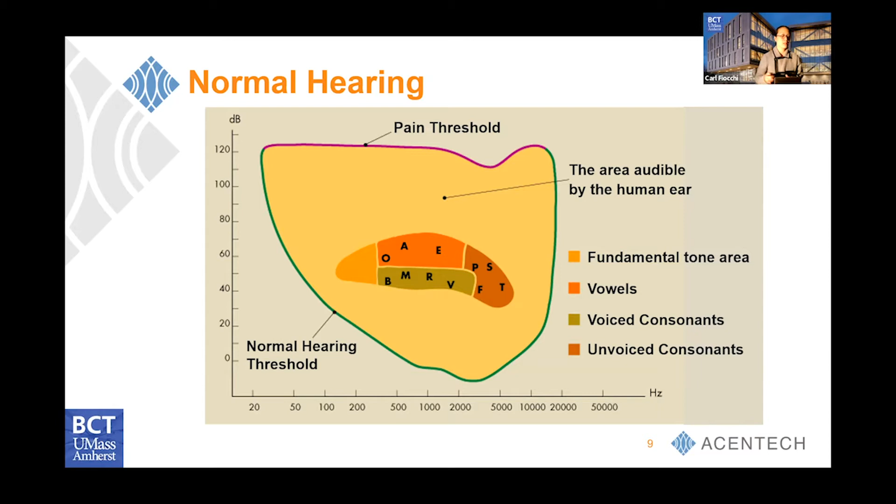I just wanted to say, sound is also noise - it's the same definition to an acoustician. However, some people that think of music, you think it's music, they might think it's noise.

I found this XKCD comic that I thought was funny, where they're getting the noise from outside and trying to cancel it from the inside, which really doesn't happen. But it's a nice interpretation of what to you is music may be somebody else's noise.

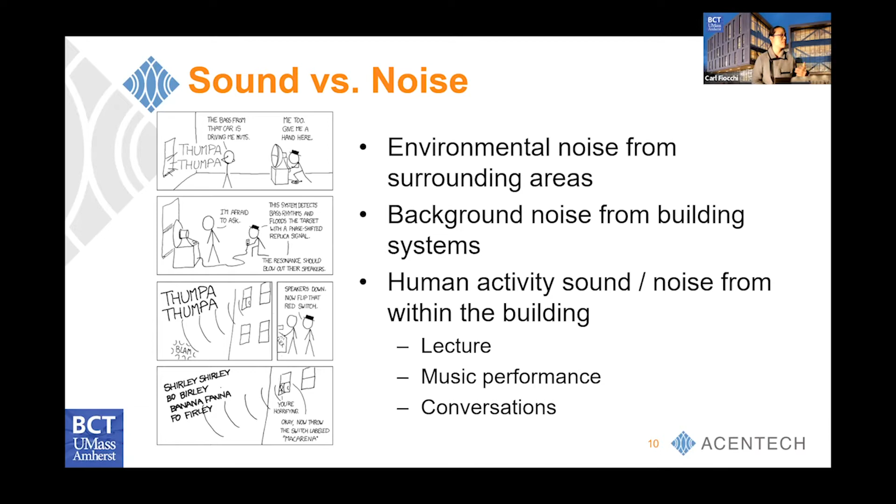The background sound level that we hear in a space also varies a lot. That's usually related to the building system and also the environment - the environment from the outside coming in and how it impacts us on the inside. We're not hearing any traffic here, for example, but if you were next to a train track, you would hear a lot of environmental sound, which we would usually call noise instead of sound.

In more critical spaces, we would start thinking about having it quieter than normal. On the left curve here, you see this is a metric we use called noise criteria. The lower the levels are, the quieter it should be. So the NC levels equate to the quieter spaces.

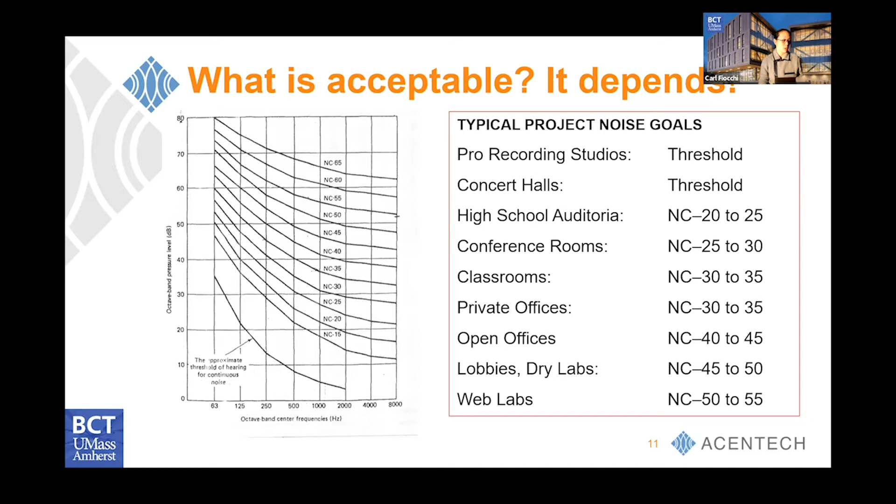A lot of strategies are done to control noise related to HVAC systems. Generally, we look at this ahead of time before things are built so that it's not a problem after everyone moves in. So what we do is study the HVAC system, the MEP system, to make sure that they're quiet. If they are not quiet enough, we rely on a lot of the equipment information to predict how noisy they might be down a duct.

In addition, we collect samples of sound levels in the community and the environment to figure out how noisy a site is. We can help design the building envelope and make sure that it's actually quiet enough inside for whatever we need.

In addition, we think about how the floors and walls and everything are built so that we don't hear, for example, the wood shop up in the seminar room upstairs. Those are things we can plan ahead of time so that we don't have as many surprises.

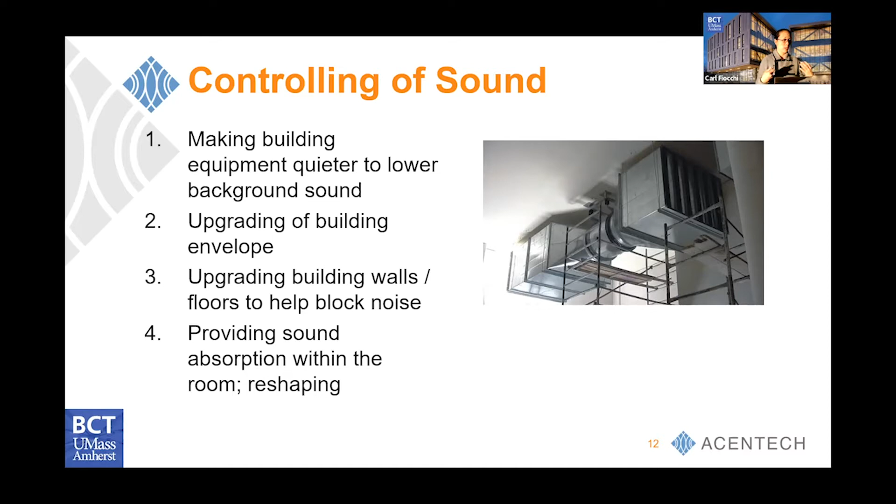Lastly, for critical listening spaces, we try to make sure that the space is shaped and provided with sufficient sound absorptive treatment so that the space actually promotes speech clarity, and also serves whatever the purpose may be for our use.

Vibration is just a different form of waves, right? It is oscillation due to an excitation of a mass.

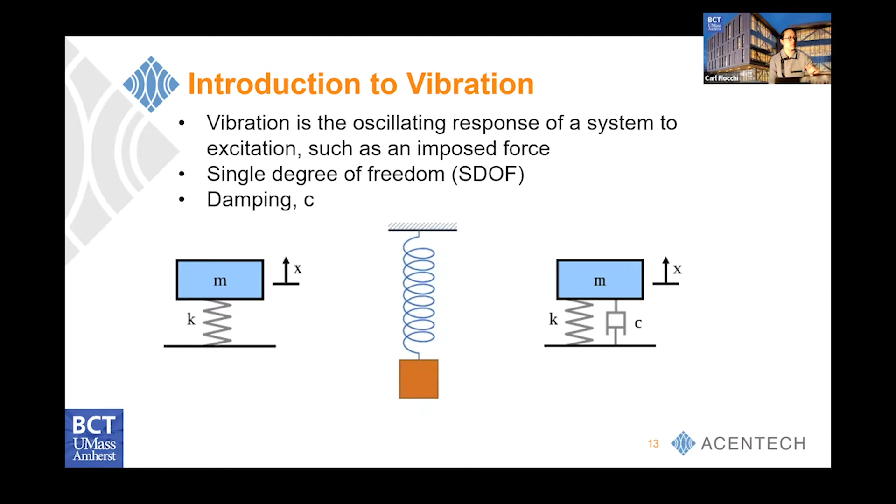You probably learned this from physics classes, for those of you that have taken physics. Here you can see it's a single degree of freedom motion. On the left side is just with a spring, but on the right side it includes some damping, the constant C. Nothing surprising here.

But in real structures, as you know, it's almost never a single degree of freedom. There's always the fundamental frequency, and then beyond that there are harmonics to it. On the left side, you can see that's the fundamental frequency, and there's only one level of oscillation, but at n equals 2 it becomes more complex. When you have a rectangular plate, it has yet another different shape at a higher order.

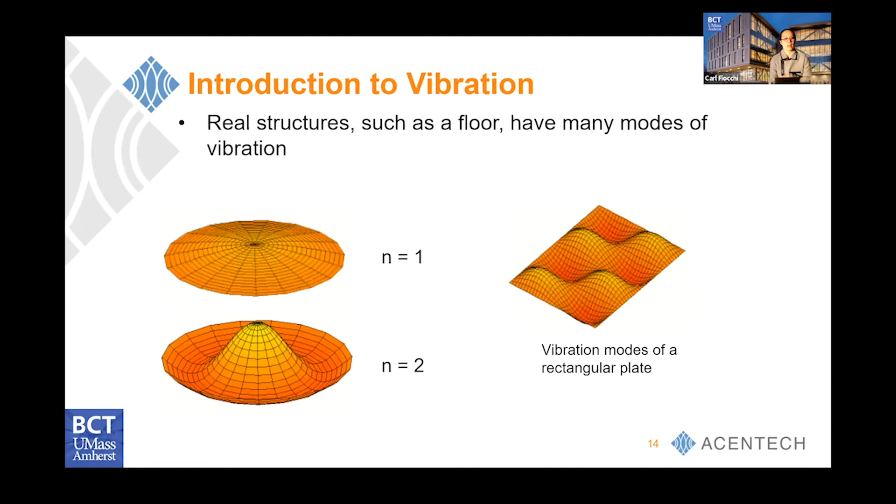So those are the kind of issues that we want to make sure the building structure addresses ahead of time so that there are as few surprises as we can have.

So for vibration, it's in general 100 hertz down all the way to the left, kind of like the mathematics, all the way at the very end. It's usually what we as humans or instruments feel in terms of feelable vibration on a building structure. So usually it doesn't overlap with the sound part.

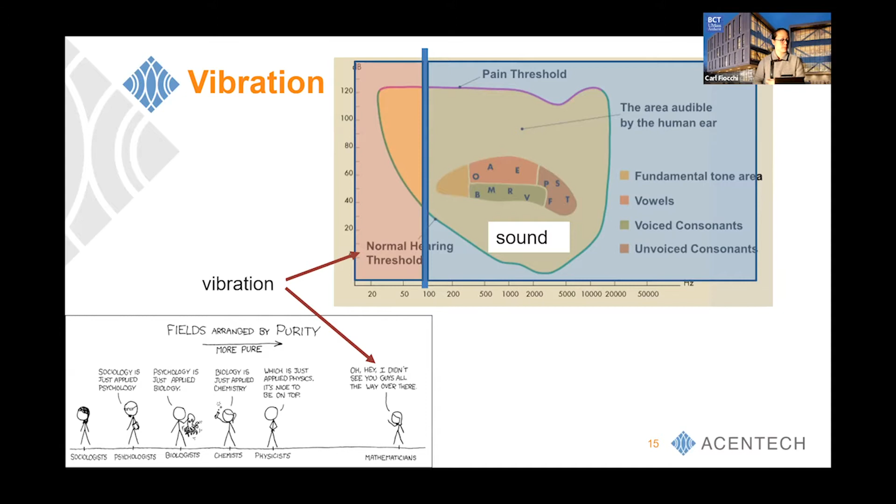There are two main types of vibration transmission, at least on footfall. The first is that initial impact you strike on a floor, which may be just impulsive sound. The second type is more like when you shake your leg after that initial footfall, you're actually exciting the floor more, and it may cause floor resonances that transmit down to other things that have the same natural frequency.

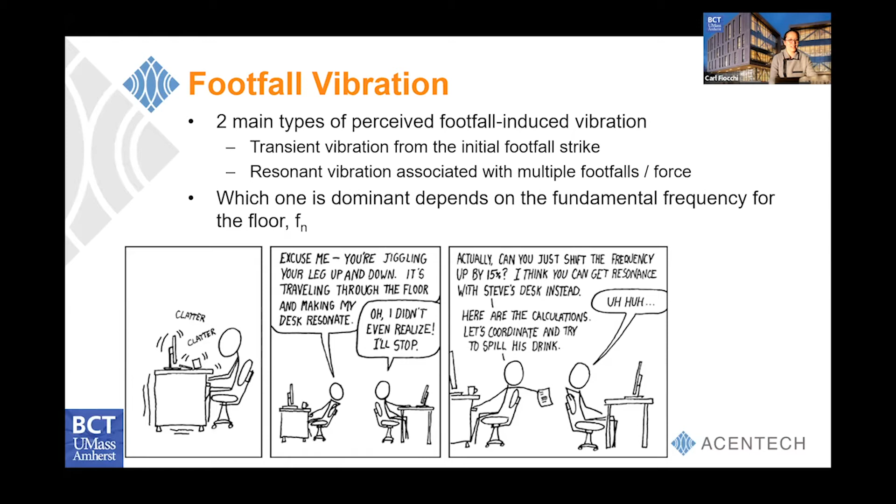Aside from building structure, there are also vibrations from the environment that we have to worry about. This is more the case with urban environments where we have subways and trains, and airplanes for sound, but there's also ground-borne vibration that may be near your building that we would survey ahead of time to make sure it wouldn't be an issue.

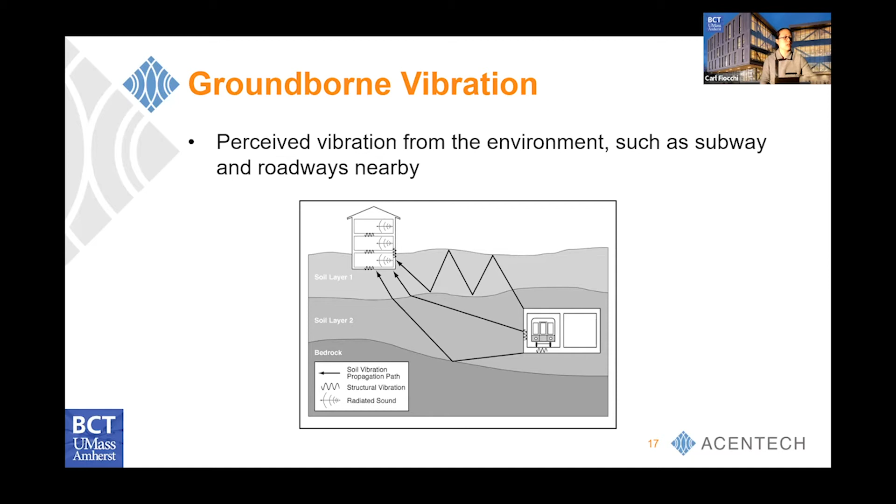Not in UMass, but at other universities, if you're building very vibration sensitive science facilities such as fabrication or clean rooms, a lot of times we will actually survey the site to make sure there are no surprises of ground-borne vibration that may contribute to our new building.

A lot of the instruments, in addition to human comfort which is what we've been describing - how much you feel vibration from the environment and also from the building - we're actually not the most sensitive. There are other things more sensitive, such as instruments for labs, and vivarium mice are actually more sensitive than us. They may be tolerable of high noise levels, but they may not breed if they feel too much vibration from the environment or from you walking by near their breeding area.

Other things sensitive to vibration, and some also to sound, are imaging equipment. Those are looking at microscopic atomic levels - imagine if you have something imaging a slice of an atom, you want to make sure that image is clear. If you have a lot of vibration impacting the image, and some of those image captures take longer than a few seconds to collect, that becomes an issue. So those are the kinds of areas where we'd worry about vibration.

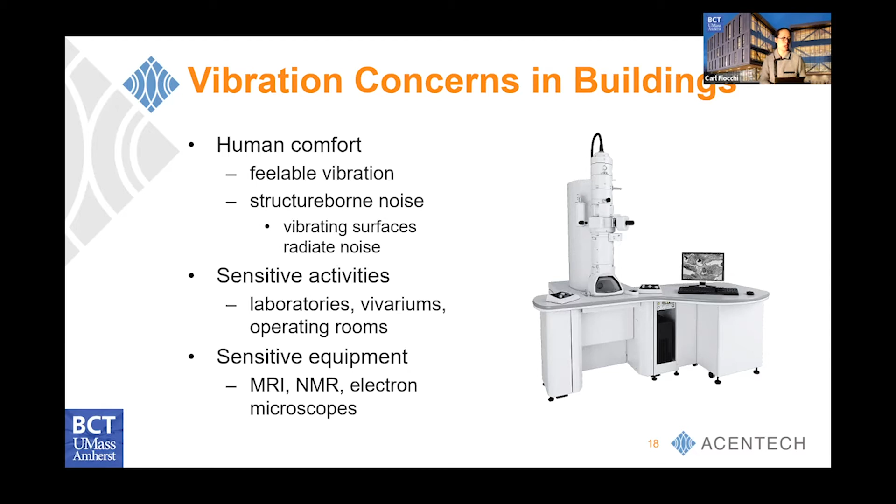The critical thing for controlling vibration is adding stiffness to a structure. In general, if you have columns or beams underneath a plate, it's going to be stiffer. Adding mass also helps, because as you think about it, adding mass means you'll block sound and also help reduce vibration. Another factor is the spring constant K and the damping C - you can add damping, and that would also help reduce vibration.

For on-grade type conditions, such as when a subway is coming in, that's a lot more complicated and usually involves isolating the whole building foundation. It's not always effective, so it's something more specialized. But for above-grade type structures, that's easier to predict.

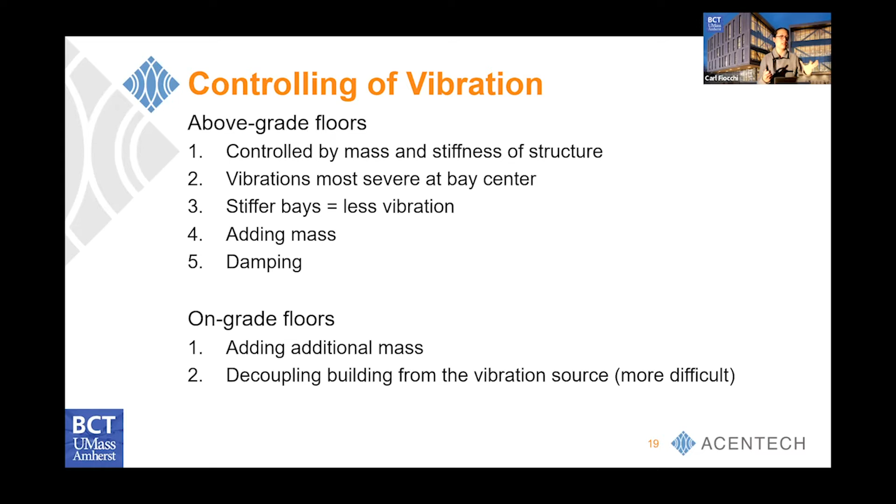So now we're going to go into what that means to our building and beyond for mass timber. Maybe some of you have seen a lot of these resources that the US and also Canada has put out. I'm sure there are many other equivalents in Europe that I can't read or haven't found, but I found the Canadian documents to be probably the most detailed in terms of what to do.

I think sound and vibration are topics for mass timber, not because we're unique, but also we're kind of the Achilles heel of mass timber in some ways. To help promote mass timber, we have to address them, otherwise sometimes that becomes the driving issue. So in today's world where we're trying to reduce embodied carbon, we should think about this, but also keep in mind that sound and vibration issues do come up occasionally, depending on the type of building we're designing.

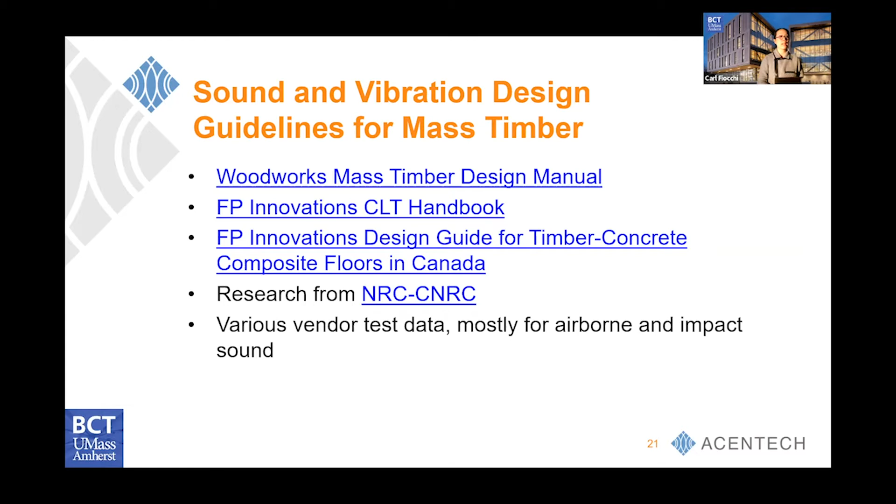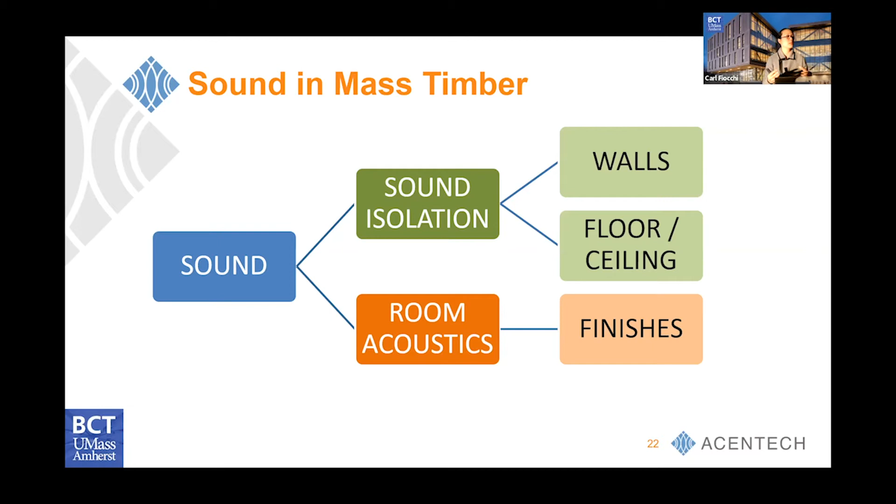So for sound and mass timber, the two things we mainly look at are sound isolation and room acoustics. Sound isolation is how much noise can we block by having mass between the source and the receiver - that could be your floor, your ceiling, or your walls. Room acoustics is more about how the enclosed space is going to sound with whatever materials we select in that space.

The ratings for sound isolation break down into two separate ratings that are most commonly used. The airborne is commonly rated with sound transmission class, which is how much the sound travels through the air, then through the solid medium, and then to the receiver end. Structure borne is what the previous one showed, all the lines flowing through the yellow parts of the structure. The airborne is more just across the actual element, like the D part, and the F are all the structure borne.

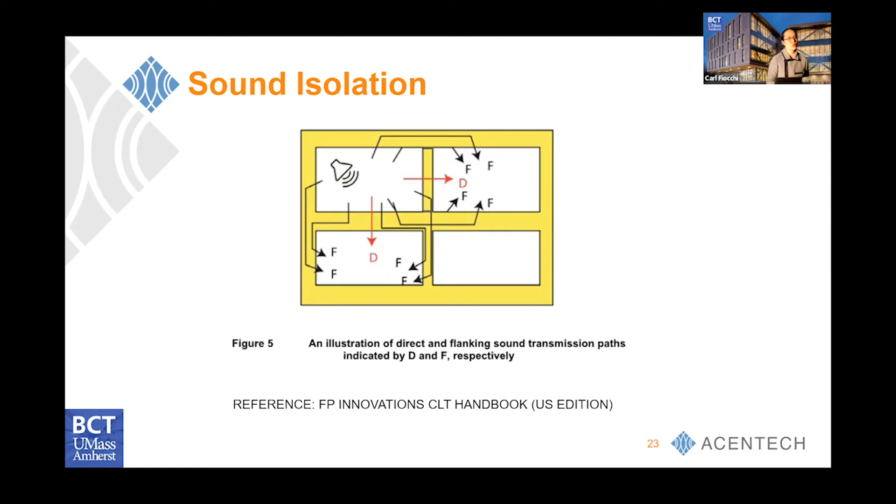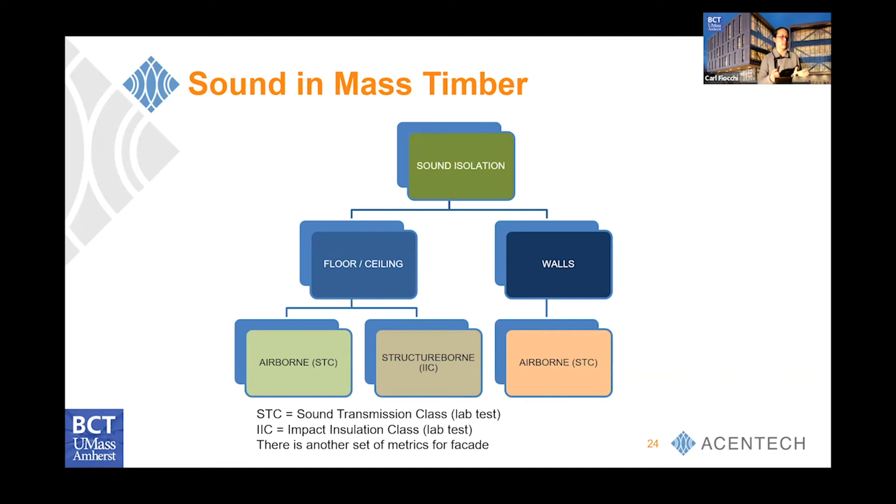Those are addressed with the IIC rating, which is impact insulation class. Those two things show up a lot in the mass timber manual as you design buildings, and some buildings are required to meet certain STC and IIC ratings. Sometimes this drives people to figure out what it takes to meet those numbers, because sometimes they might be too low.

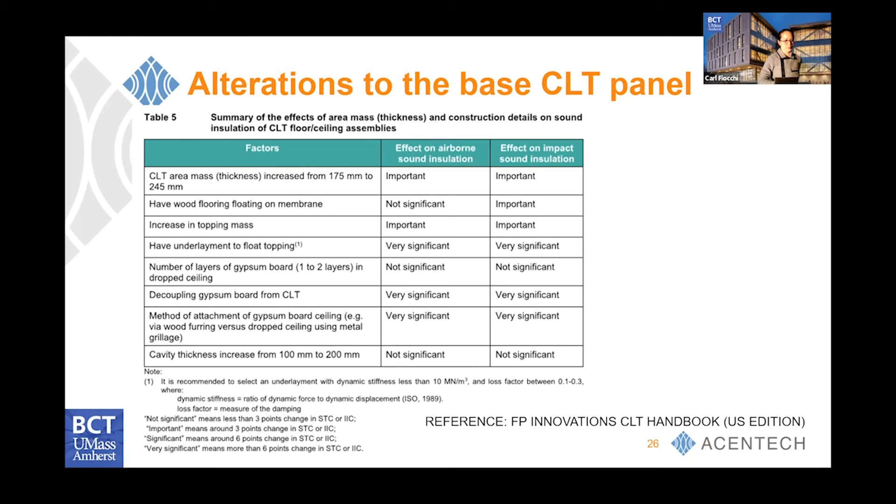So here's an example of when you suspend a ceiling, and you can see that it helps improve the rating. The A is just the field condition versus the IIC, which is the lab condition. So AIIC and ASTC are field-measured assemblies.

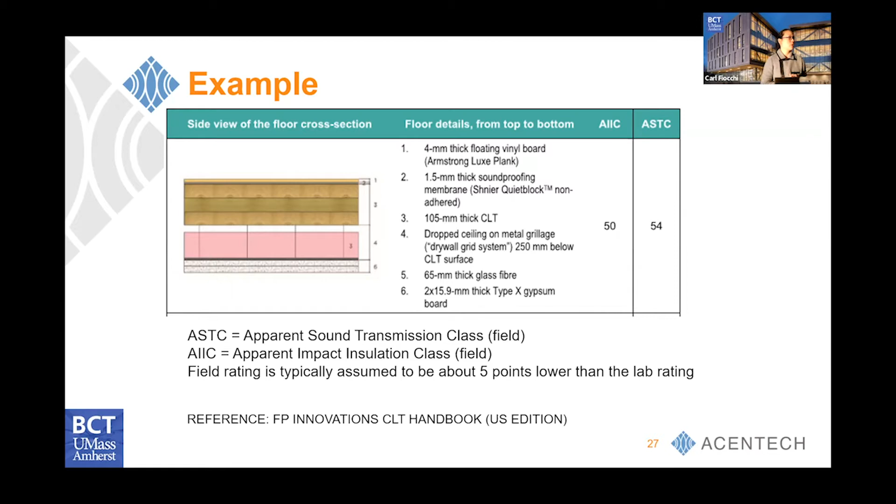This is a section through the floor, and you can see the suspended ceiling and insulation. A lot of the manuals and references available to us have preliminary assemblies you can consider, some supplemented by vendors that have tested them rigorously, as well as national institutions such as the one in Canada, so we have a database to compare and contrast when designing a floor assembly like this one.

Now I'm going to talk more about the room acoustic side. I know the last part was a little heavy because it's all about sandwiches of floors, but for room acoustics, it's more about how the finishes impact how sound sounds in the volume.

When you think about being outside, the sound doesn't really come back to you when you start singing, like in The Sound of Music. It just kind of goes and never returns, unless you're singing right at a cliff, and then the cliff reflects the sound back at you as an echo.

But when you're indoors, the volume really matters, because you're trapping most of the acoustic energy inside and it's bouncing around freely until the energy dissipates or gets entrapped in whatever material is surrounding the space.

Somebody a long time ago figured out a way to measure how much a certain material may absorb sound. They used a pipe organ to measure how long a sound takes to decay when you measure an impulse sound. A body is about the equivalent of 6 seat cushions at the time, so I thought it was kind of cool that the man is actually enclosed in the box on the left bottom here.

He was trying to make sure the absorption from his body wasn't impacting whatever he was measuring in that room. This was like an early version of a test chamber, and the metric they used early on, still used in certain variations, is reverberation time.

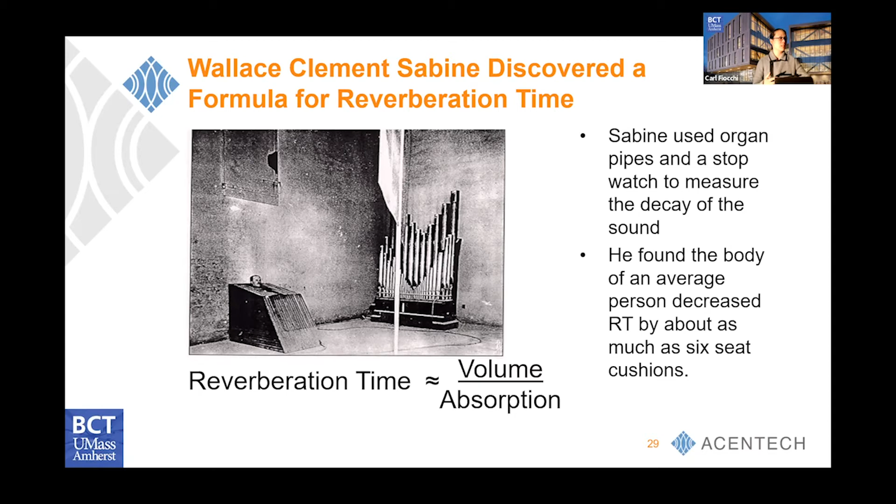It's really just how long it takes for an impulse sound to decay over time, and it's very related to how much volume and absorption is in the room. So a longer RT means you've got greater volume. That makes sense, right? Because earlier we saw it's volume divided by absorption, so the higher the volume, the greater the RT.

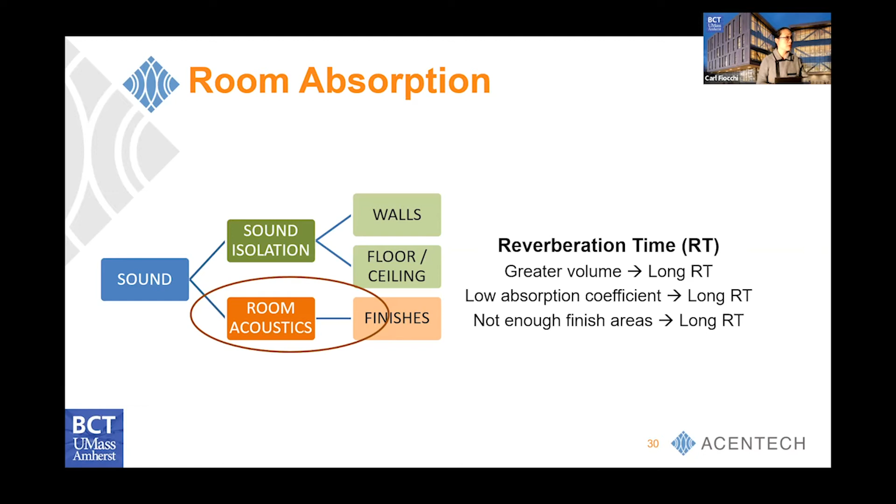And if you have absorption materials that are not as absorptive, then you also have a longer reverberation time. Or if you don't have enough absorption in terms of square footage, you also have the problem of a longer RT. So when they test these materials, such as the wall panels you see at the back of this lecture hall...

What happens is they're measuring how much of that sound energy is coming back, or whether it's getting dissipated within that medium. Once it gets into the material, it's not reflected back to you—it's absorbing sound.

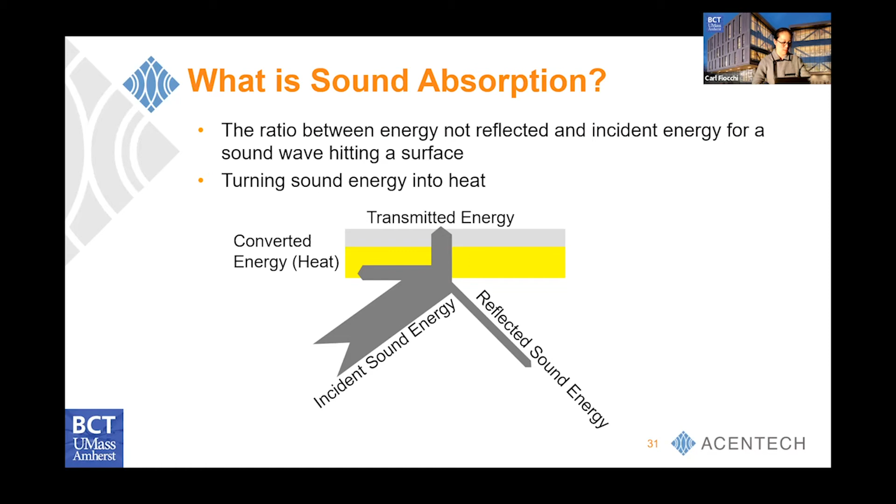So when you think about a swimming pool that's all metal with not a lot of absorption, and a huge volume, we can end up with a very long RT. But there are solutions and materials we come up with to address that.

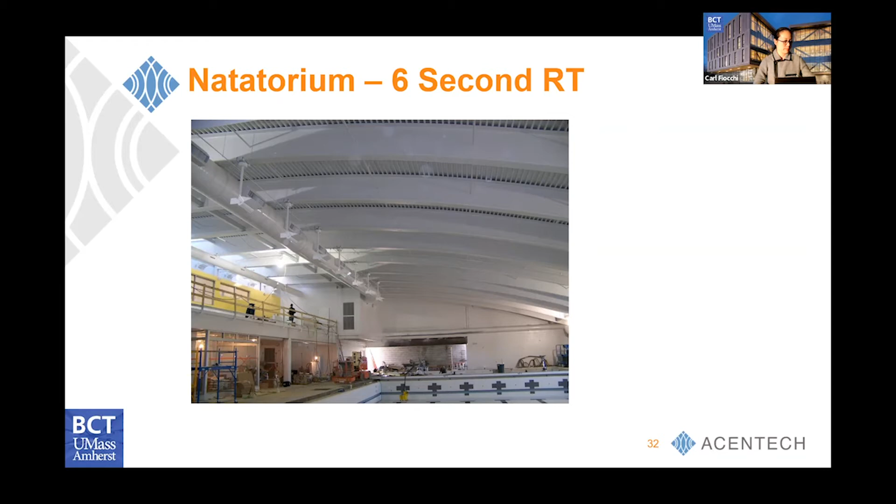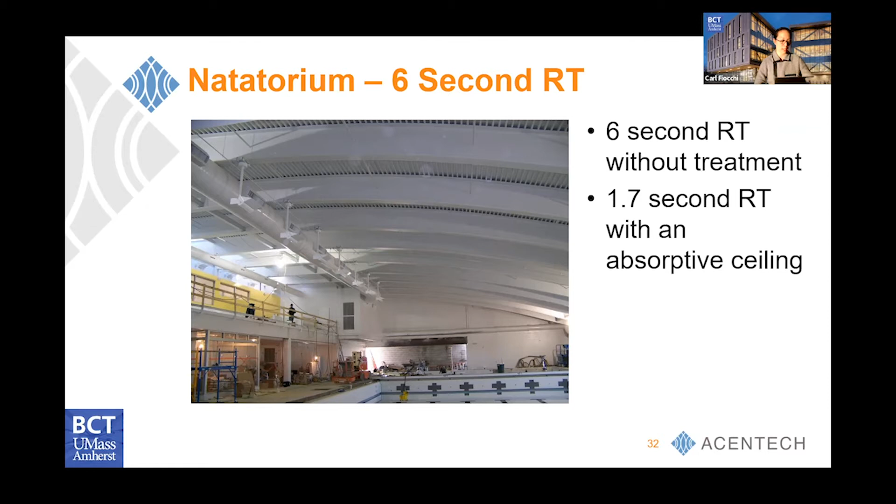So 6 seconds without treatment. But then once we added materials to the metal deck or on the walls, we were able to drop it down to 1.7 seconds on a project, which is quite a bit.

Absorption coefficient is just a way we measure how the material behaves. If 1 is the most absorptive, then 0 is the most reflective. So when you think about brick, wood, concrete, glass—those are all on the lower end. Something like acoustical wall panels is very absorptive, because they have a substrate that helps absorb that sound energy.

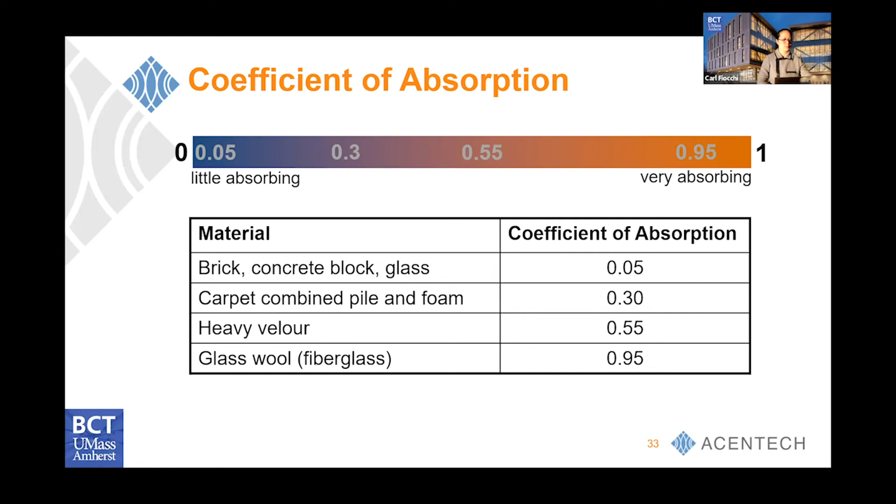All right, switching gears, talking about vibration now. Vibration is a topic that comes up in 3 categories, as I can see, at least from mass timber.

One is that when it gets really tall, the wind comes into play, because it's having a torsional motion also. That's not what I'm going to talk about today, because there's another consultant called a wind consultant, and they study more of this condition, which is quite fascinating.

For us as vibration consultants, we look a lot at the above-grade condition and also on-grade. For above grade, there are two things: there's footfall from walking on a corridor or anywhere near anything we're vibration-sensitive about, and then there's structure-borne vibration, such as rotating equipment, pumps, or rooftop equipment vibrating the structure and transmitting that vibration down to a sensitive space.

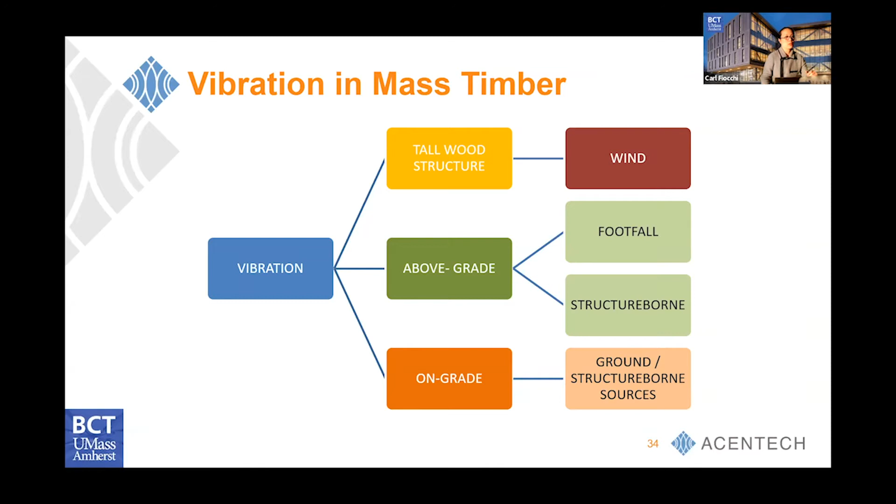And that can also happen on grade, but also on grade is coupled with whatever your outside environment might trigger into your building. So those are all the paths of vibration that we worry about.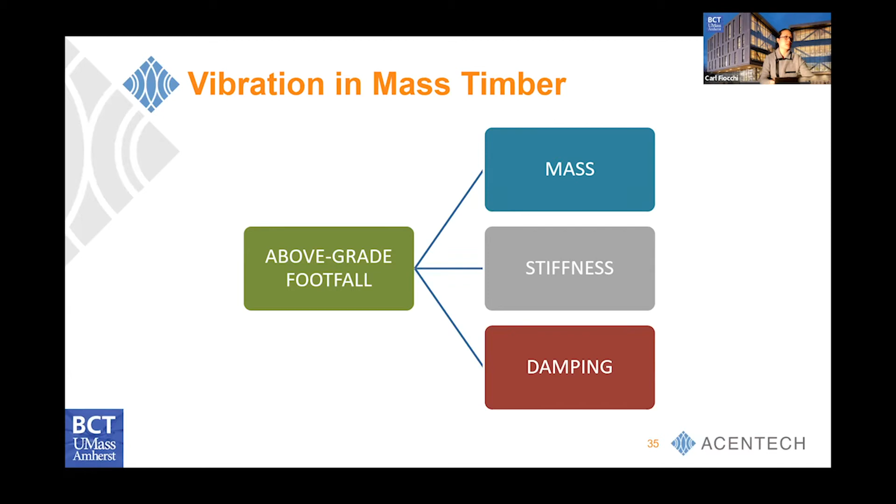So let's focus on the above grade one. There are three things: the mass, which is what the square we saw earlier in the image of the spring mass system represents. Then there's the stiffness, your K constant on the spring. And then damping, which is the C, how much the structure is getting damped. All of those things help adjust the vibration of a structure.

So in one of the mass timber handbooks, they have some examples of what the mass, damping, and stiffness are. And you can see here the Achilles heel of mass timber, which is that it is definitely not as heavy. So when you think of 5-ply, 7-ply structure, it's very thick. For the same thickness, you can get a lot more mass with concrete, steel, or composite deck. That's a bit of an issue because we're trying to create something where we don't feel the vibration.

And the damping is better - the damping ratio is more comparable to concrete. But material stiffness is another area where concrete and steel are definitely much stiffer than mass timber. For light wood frame, I'd say a lot of times those issues are addressed by having a suspended ceiling, so there's more damping anyway. There's also gypcrete topping we add in a lot of wood frame structures.

So for light wood frame, the application is normally used for residential use, and it's a bit more flexible. But for mass timber, because it's competing often with commercial buildings and also academic buildings, we suddenly are reviewing all these conditions to make sure they're actually achieving what we're trying to do for a higher vibration and sound level.

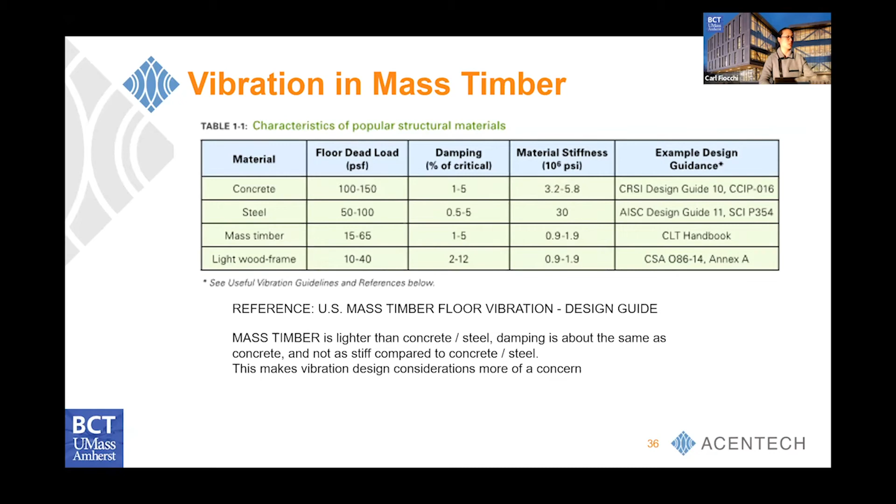So vibration, like I said earlier, different spaces have different vibration sensitivities, and human perception is above the red dash line here. In general, we're quite tolerant - for daytime it's 8,000 microinches per second. But for a lot of things that are not humans, it's all below the line, in particular for research and manufacturing spaces. So those are the first questions.

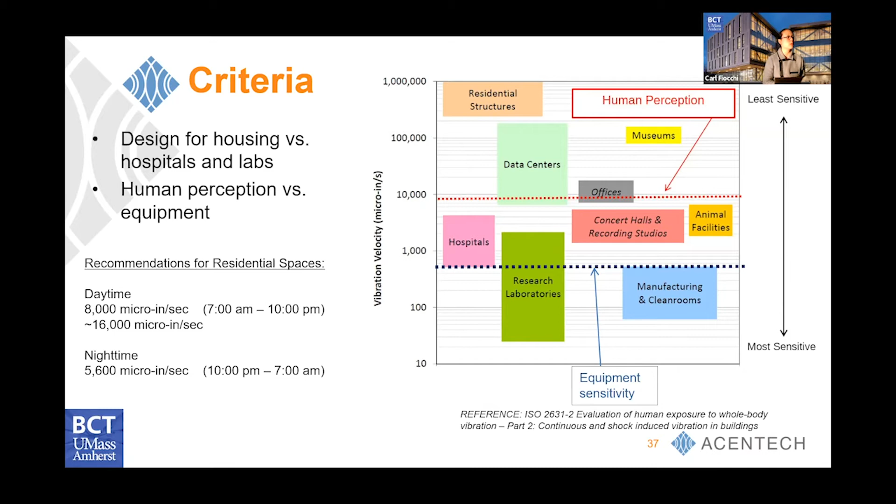This is why it's easy for light wood frame to be used for housing, and also mass timber is often used for housing. But once you want to use mass timber for other uses, we have to ask these questions so that we know what we're designing for, because it's not one size fits all.

When we measure something at a site - this is an example from one of our projects - you're trying to figure out whether the vibration is going to transmit to the building structure. We have to get the raw data first, which is what we're showing here. There's the red line which is the max, and then there's the ambient, which is when nothing, like when there's no train passing by. There's already a little bit of vibration going on at the site, right?

And then when the train passes by, it peaks, and we try to figure out where the peak might be on the graph so that we can establish what the vibration criteria might be and what it's appropriate for.

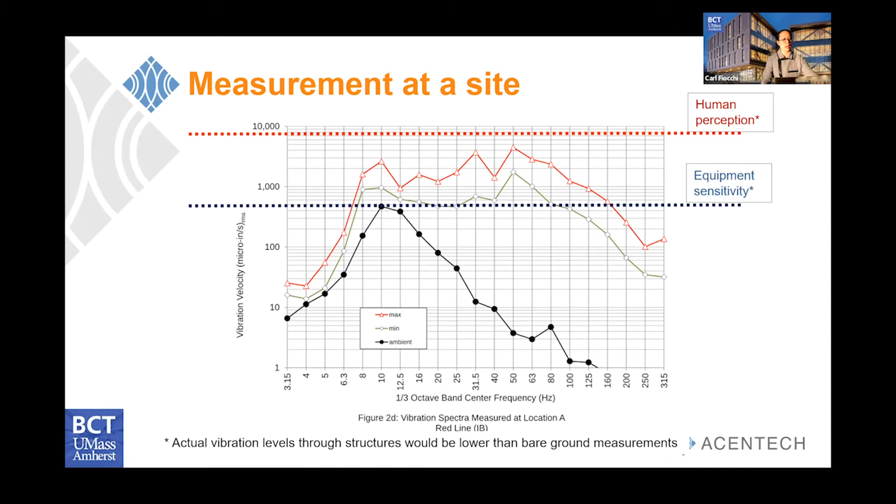So to address this, there are a lot of papers about providing more of a composite system - not just pure mass timber, but with concrete, gypcrete, and damping added. For example, in this building we added concrete. I don't know the main reason exactly, but there were definitely concerns about sound too. So we did floating concrete topping over a padding, which helps increase the mass and provide more damping. Another way of increasing the stiffness is by reducing the span between the beams.

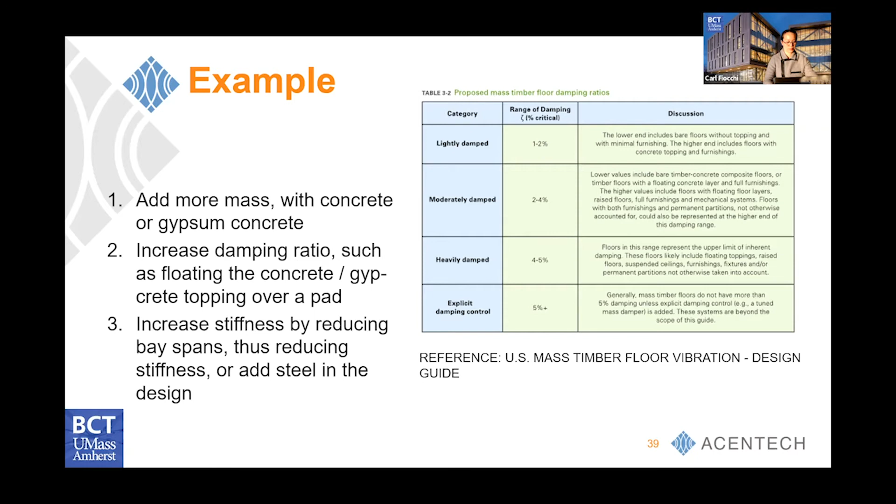So here around campus, you all know this building over here, which is probably one of the first ones. It's definitely my first project on mass timber.

This reminded me to say that before DLTs, CLTs, and NLTs, there was the mill building. That was the earlier form of mass timber that was quite common all around here, and they have a lot of the same issues. They were used for a lot of manufacturing uses, and they were not usually particularly sound or vibration sensitive. But when the manufacturing phase went away and they started converting them into offices or housing, we address a lot of the same issues for sound and vibration, the same way as we do with the mass timber we see now in this building.

In the student union, I believe that's also some form of mass timber system for the new ballroom, although I haven't personally visited myself yet. That one, I believe, has a steel structure also as a combo, but it doesn't have a lot of places where there was mass timber. It was just only in the ballroom, whereas in this building it was definitely throughout the entire building. I think the Olver has wood columns, but a lot of the buildings today that I've seen more recently have a composite, and combine it with steel columns.

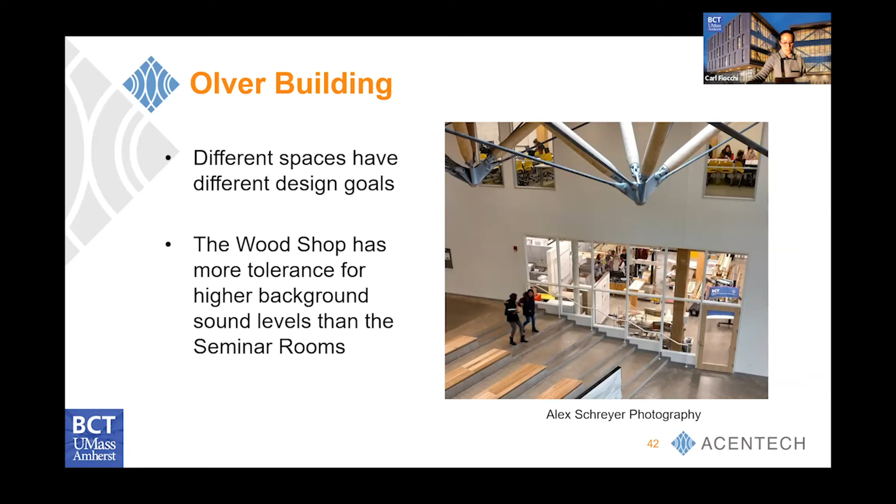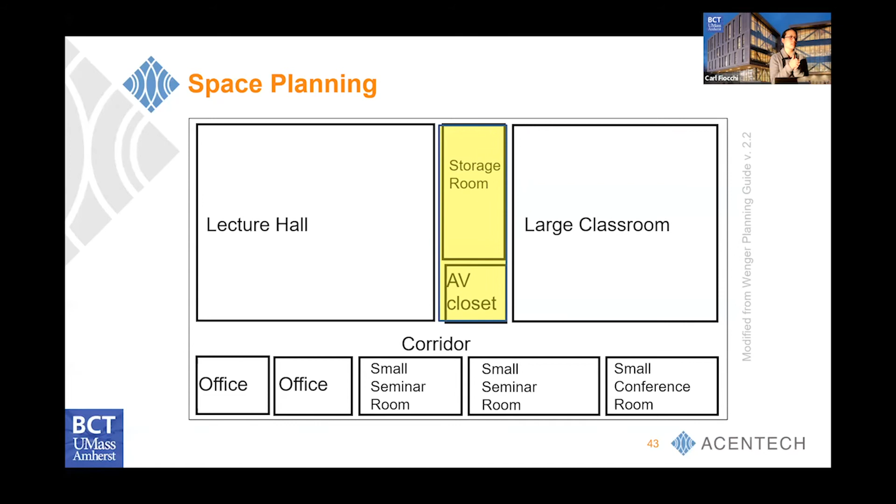So what we did earlier on was trying to figure out a buffer space so that - this one is a different space, but we try to buffer it a lot of times to avoid expensive constructions so that we don't have to do it everywhere. In this case, from this room to the classroom behind, we tried to have the storage room so that it's not right next to each other where you have two sensitive spaces.

So if you had spaces like this, where it's right up against each other with no buffer space, then all of a sudden this wall behind us may need to be a much better wall than what it otherwise would be. This is not a big issue for one or two walls, but sometimes when we work in, there's a lot of repetition and conditions where we're trying to save money so the building is more efficiently constructed. It's actually really important to plan out those adjacencies and think about them early on in design rather than later.

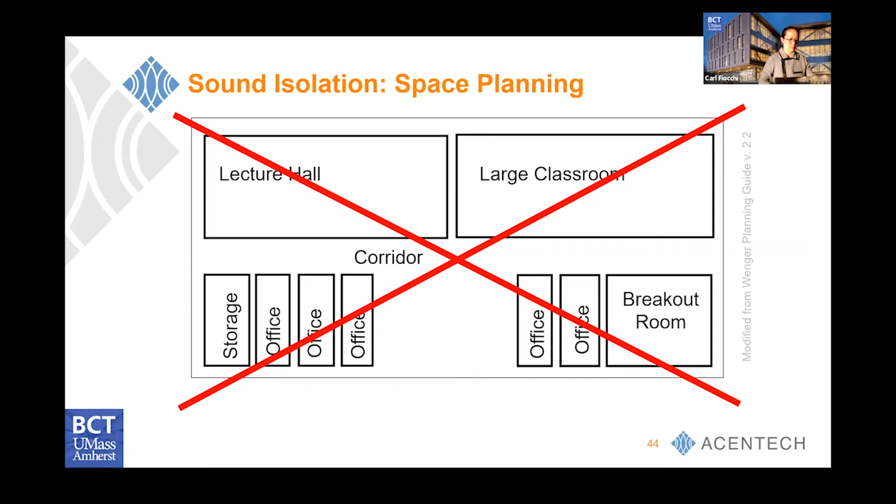So here's that space.

Other things we think about are HVAC noise and how it impacts the space. Those are all studied early on by having the sound data from the mechanical engineer and the vendors that supply us with this information. That way we can predict down the duct and calculate how much sound is actually going to get here. I would say we do this for both interior sound and also exterior sound to the community. It's not spot on, but there's always some calibration that's needed. It's a pretty good tool for us to figure out these things ahead of time so that there are fewer surprises later on.

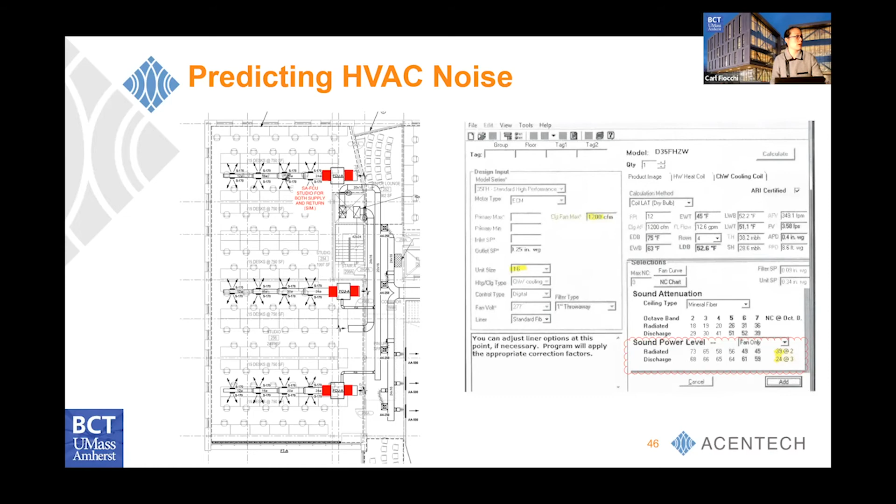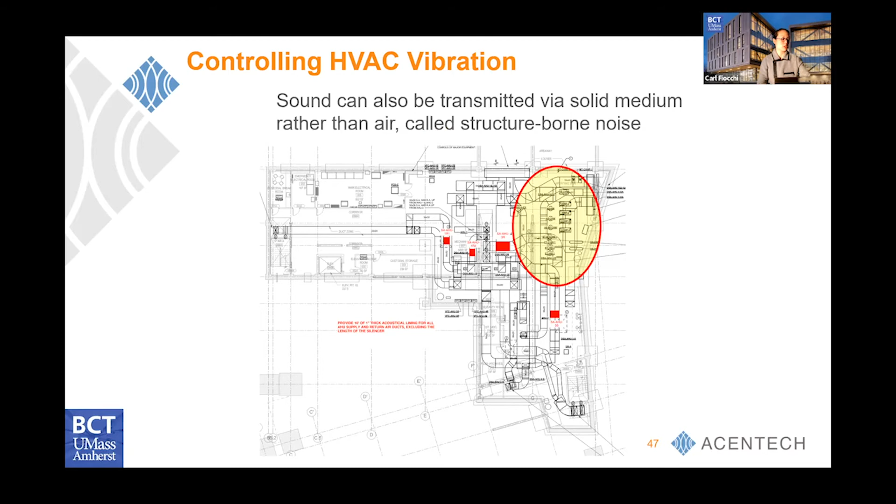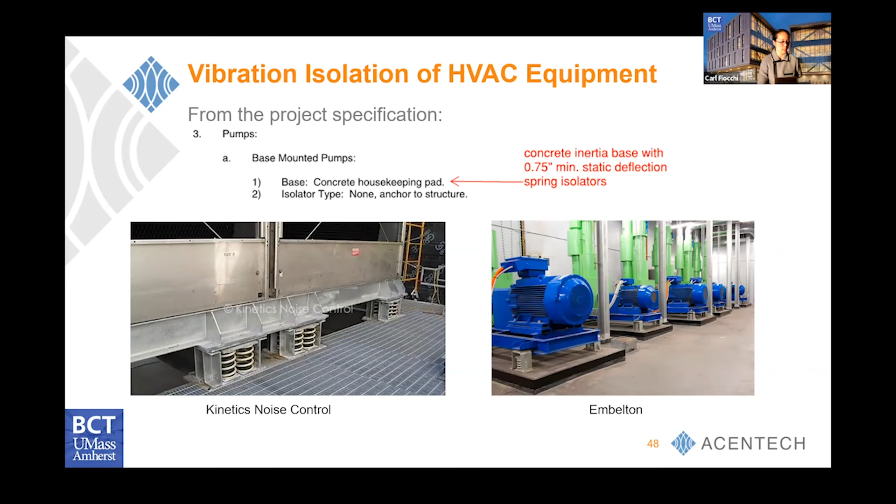Then the other thing, as I said earlier, for structure-borne vibration, which translates to sound also on the higher frequency, is making sure that all the pumps and equipment are vibration isolated so that they reduce the transmission of this energy. This is literally mass over springs on the solid part you can see in the image here, and that's what we do to try to reduce the sound source and the vibration source. The left side is a cooling tower, I think, and the right side is just pumps.

There are also other conditions where sometimes to save money, or just due to omission of details, walls don't go up all the way to the structure. Maybe you have a really high spec and you want to save the height, and logistically it's really expensive and difficult to build a tall wall. But that also creates a flanking path across the wall. So it's not always just about the actual mass that's separating the source and the receiver.

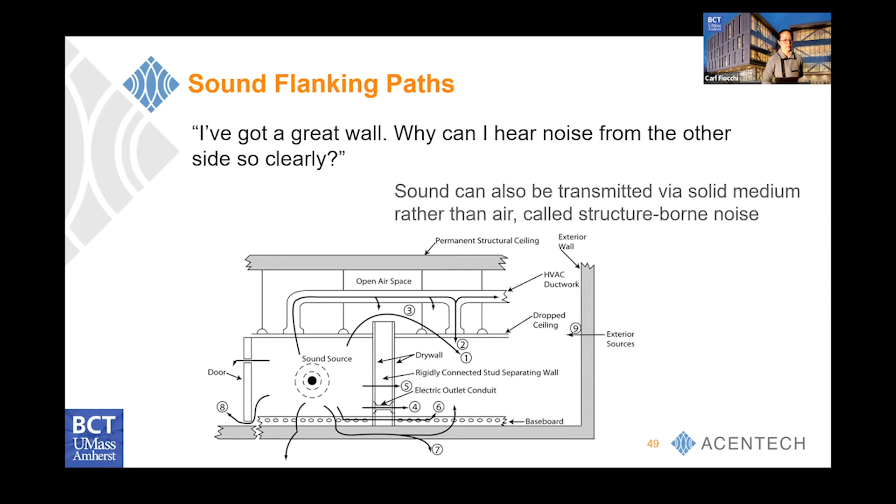As I was talking about the wood shop, I realized I didn't move the slides in the correct order. So to address the noise going to the common area, we added vestibules instead of something more expensive, like an acoustically rated door, which could be really heavy to operate, very expensive, and wears out over time. Instead, we added a vestibule so it's a bit more of a hassle, but it helps reduce the noise going out to the common area.

The glass there was also a concern, and we debated over and over about how important it is for you to see the wood shop when you come into the lobby. It was a showcase kind of space. The BCT lab is not as noisy, so we didn't think they had to have the same glass treatment. We debated with the architect about what type of glazing is appropriate to reduce wood shop noise into the common area. I don't know if that's actually a noise concern in the end, but these are the kind of issues we predict and discuss to try to reduce having these problems.

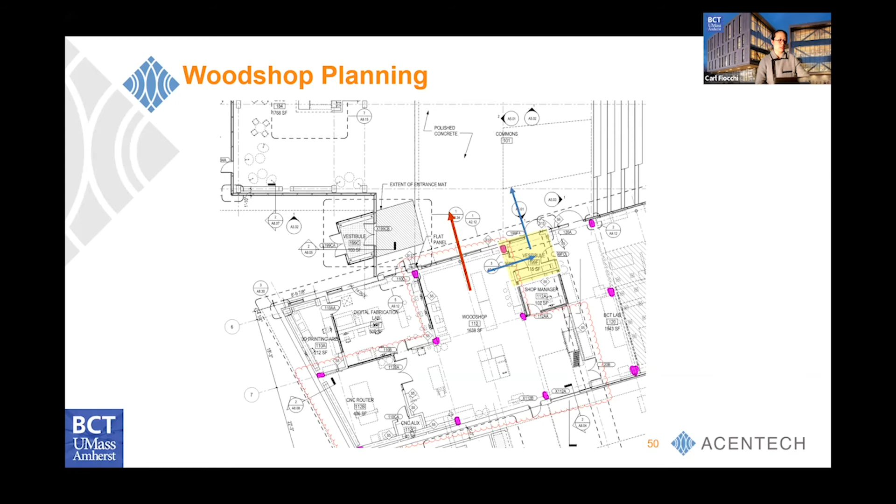The vestibule is down that way, so it's a lot more indirect, which helps. We also looked at noise from the wood shop vertically to the seminar room and to the chair, it looks like—I don't know which chair it was.

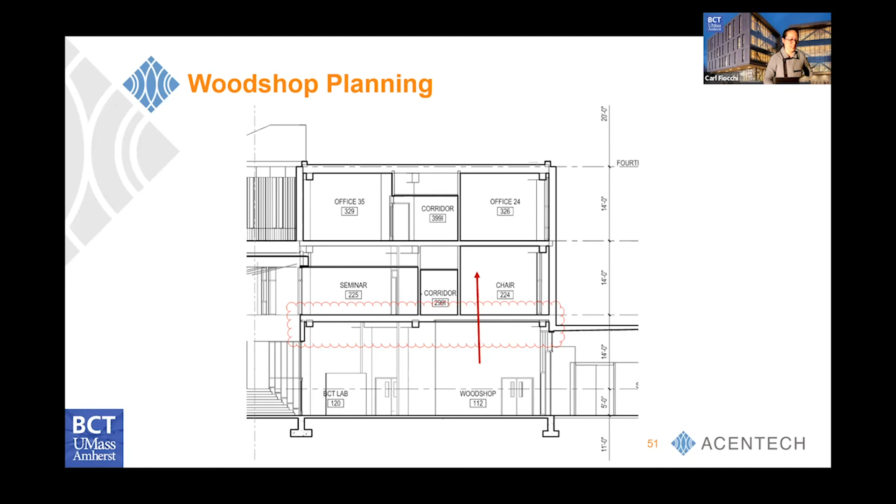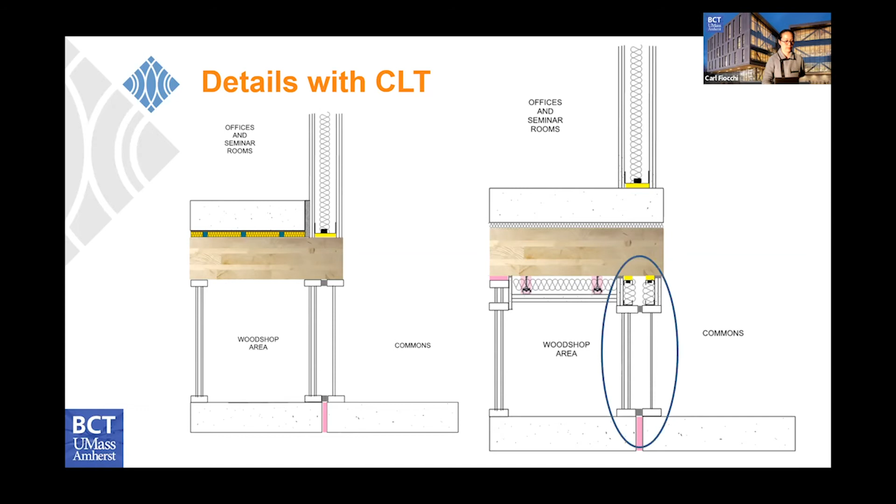Like I said earlier, we try to make the structure visible so you can see the wood, but it's not always possible. So wherever we need a quieter ambient, we try to either decouple the concrete or add a ceiling below it, the wood. You can see there are two options here that were discussed. That was the window I was talking about earlier.

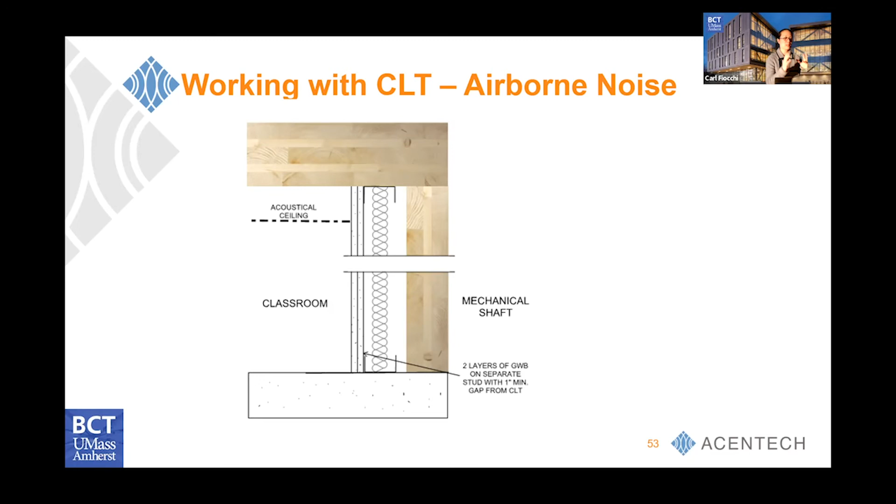Sometimes we also add a separate stud that's separate from the wood structure to help reduce noise. But in this case it's harder to decouple, because what if you had some other flanking path down the wood or the concrete? This isn't always the best solution, but it's another way of addressing when you have a mix of wood plus concrete plus drywall.

On the room absorption side, I said earlier there's an absorption coefficient for different materials, but I find architects often get confused about what is blocking, absorbing, and doing neither. For example, we have glazing with an opening—that's partially blocking sound, but not really effective at it; it's more plainly for safety. The middle image here is used for reducing reflective and reflected energy to the surrounding area, so that's definitely more for absorption. Does it block anything? No, because it doesn't have the mass needed to reduce the sound source to adjacent spaces—it only helps dissipate sound energy within the space.

Another common issue we see is you spend all this money on a mass to block sound, and similar to the glazing, if you had a door undercut, it kind of defeats the point of blocking the sound. So it's very important to coordinate all these details and make sure everything is executed as finely as it can be.

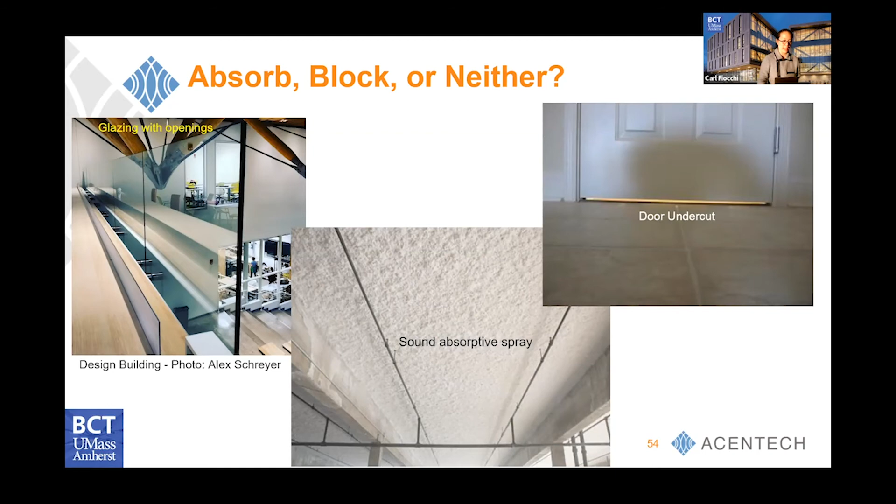So the wood part is not sound absorptive, and that's very reflective, which poses a design challenge that sometimes fights with the aesthetic side. For us, the wood, the concrete, the drywall, the glass—there were a lot of things we were struggling to balance with the absorptive element. You notice that more as you go up the floors to the studios. But the difference is the upstairs spaces are more heads-down space versus the seminar and lecture rooms where communication across the room is critical.

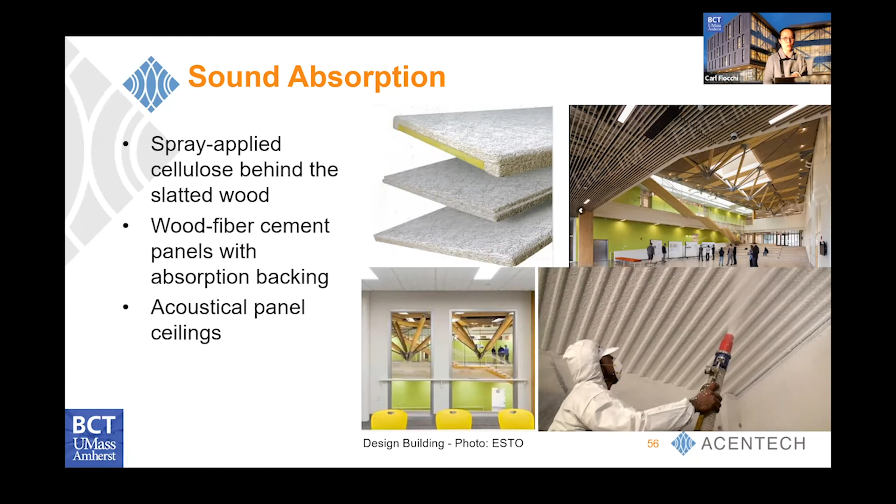Where was that? Yeah, this one on the right side—and it wasn't a dark color. So when you walk out and look up, you may see it, but I think nobody wanted to see that there. Trends have changed though—when you go into offices now, a lot of them have that exposed spray as the finished product, but when this was designed six years ago, it wasn't trendy to do that. So it's interesting because we have to follow the architects in terms of what's trendy and what's not.

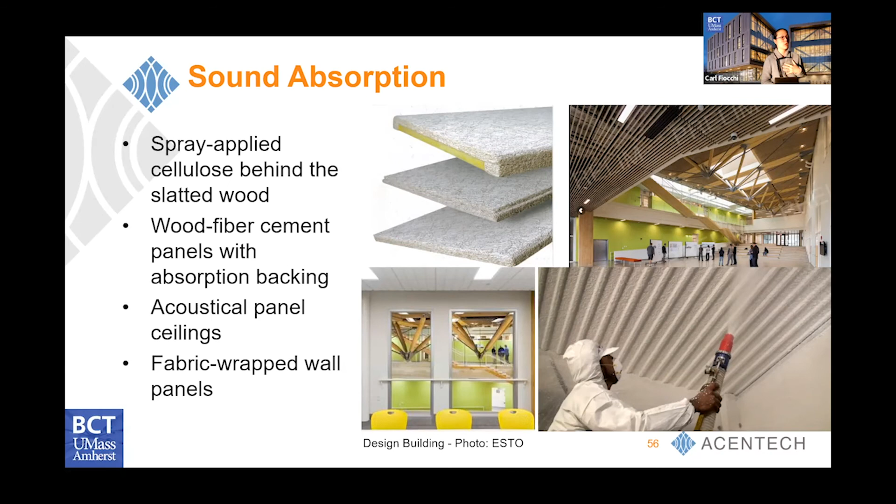And in fact, ceiling tiles right now are not particularly in trend. So we actually have discussions with vendors trying to understand why they're not trendy and how we can sell more acoustical material. For us it's also beneficial because we actually want more absorption in that space.

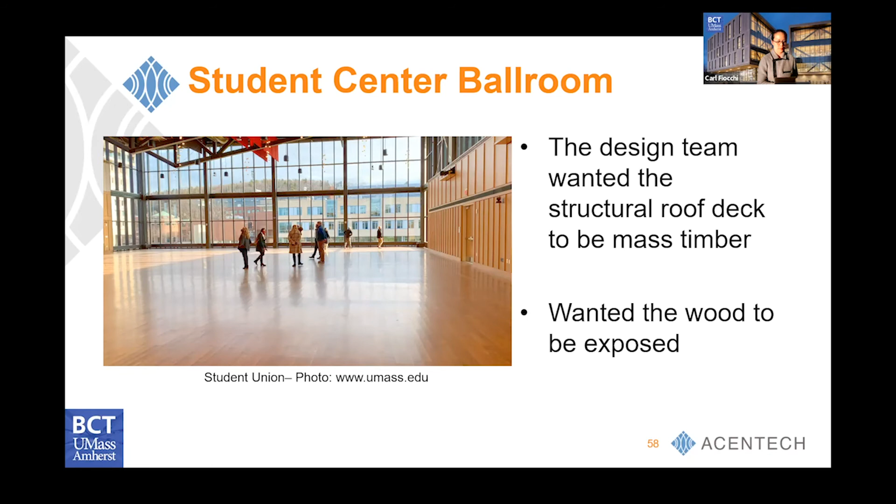Another thing only a few companies that make laminated timber do is actually add absorption into the structural element. That's DLT, dowel laminated timber, versus your more traditional cross laminated timber, CLT, which is horizontal. The problem is DLT has a different structural strength than CLT, but the benefit is you get two-in-one for acoustics—you have the absorption and the structural part combined.

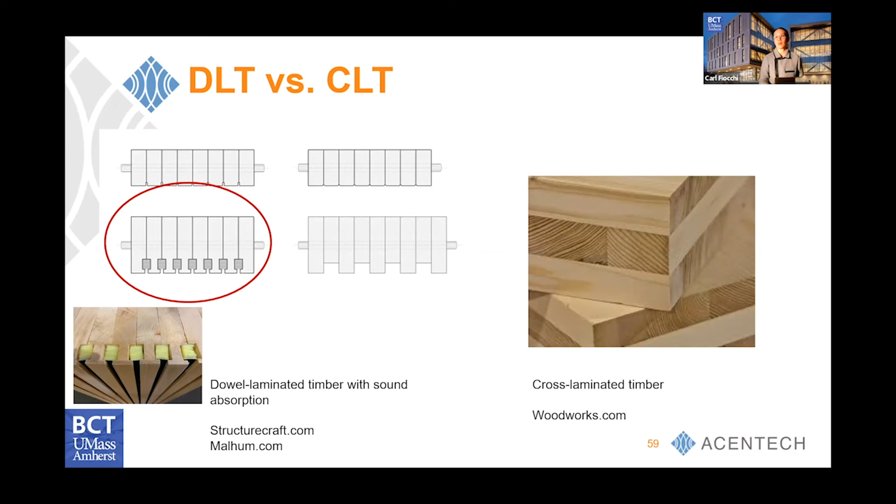Unfortunately, with a lot of public jobs, it's very hard to find three equals for bidding. DLT I haven't seen a lot in projects around Massachusetts, but we try to discuss this earlier so the structural engineer can buy in if it's something we can go towards. Even though we suggested DLT, CLT was the selected choice in the end. Being a state school, they have to have three equal bidders, and we couldn't find three equals for DLT. So that's why they added absorption the way they did, with the hanging baffles.

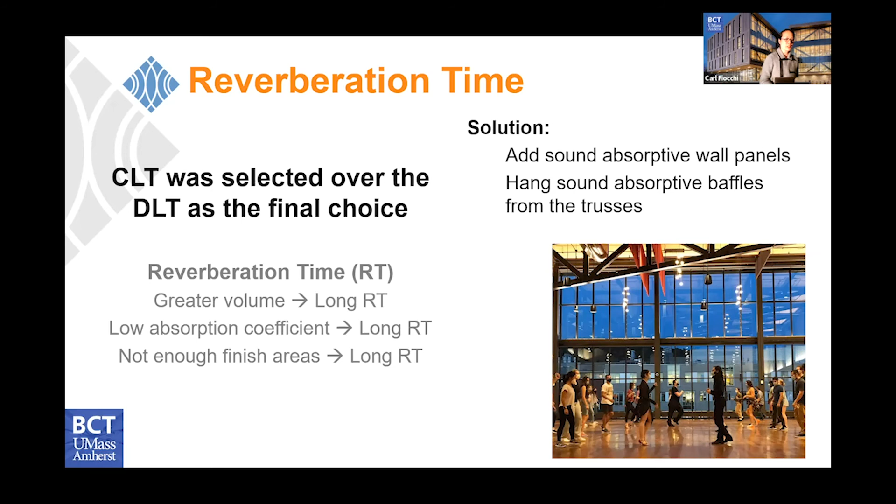With the negotiation with the design team, a lot of times we struggle with form versus function, and sometimes we want the aesthetics to trump the function. For example, in the studio spaces, you'll notice there isn't as much sound absorptive finish as we'd like, but it is gorgeous, and the daylight is amazing because of these giant windows up to the deck. We understand, because when we have these discussions, everyone says, well, I want it a certain way because I want the windows maximized, so I don't want to drop the ceiling.

And then another consultant says, well, I also want this.

Everyone is trying to pitch what's important to them, so for us, we have to balance that all out with everybody else in the design team. And I would say that's hard because then you have spaces that are too reverberant, and occasionally it may be really hard for people to work in those spaces.

I use the top floor studio, the landscape department, as an example, because they also have the PhD students overlooking the area, and they have a greater volume than the lower floor space studios, so you really notice the longer reverberation time. In case you're curious, you should go upstairs and listen to it yourself and experience that.

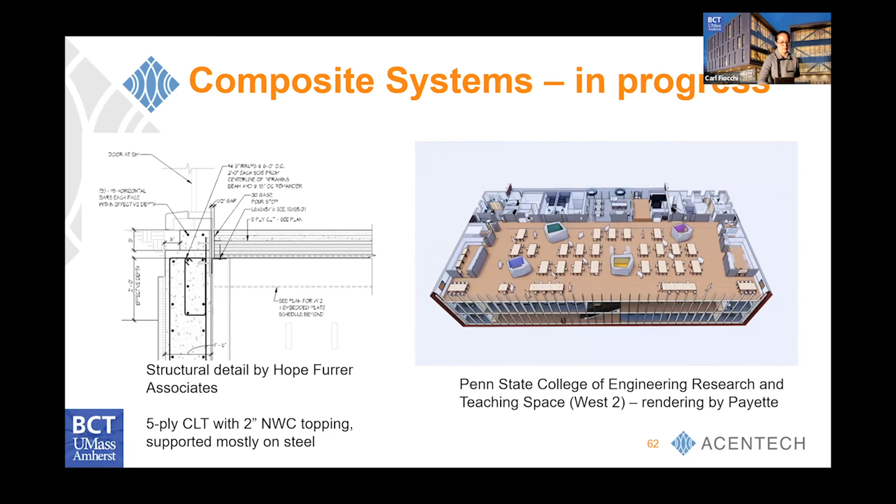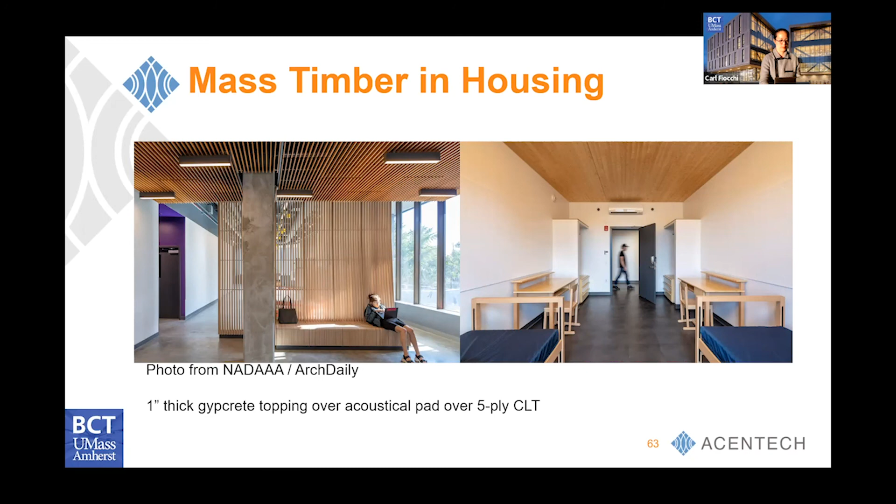Lastly, I'll go quickly. There are a lot of tools we use to predict sound and vibration. We do use SketchUp to prepare the shape of the space a lot of times and import it into our own applications and different programs to analyze acoustics. So for room acoustics, that's what we definitely use.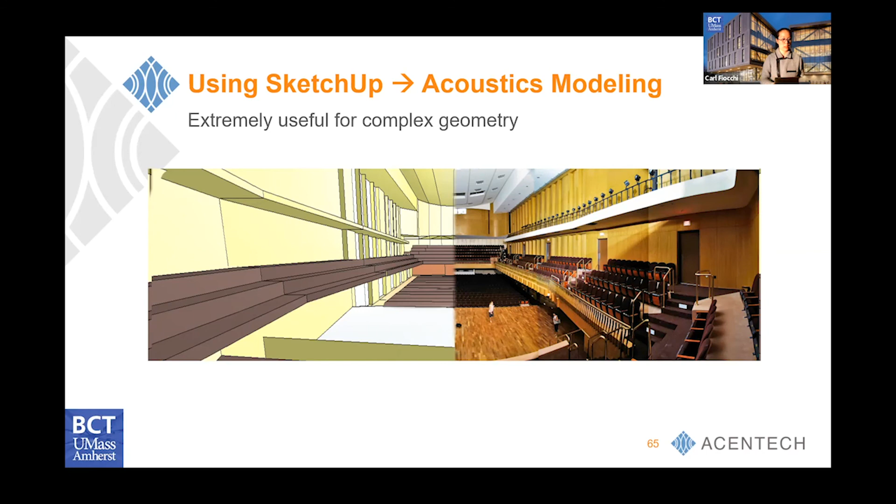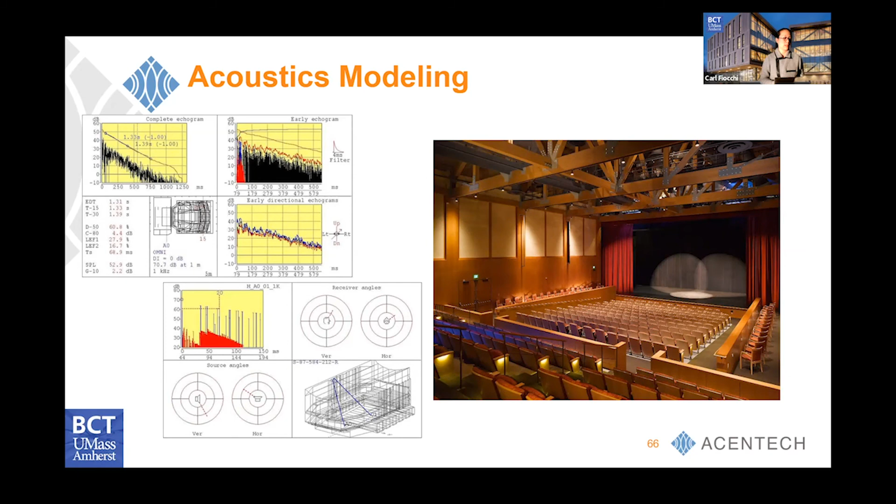I believe you're all familiar with SketchUp. We import it into our own modeling software that is more used in the acoustician world, and that's how we predict how sound propagates in an enclosed space. Similarly, we use that for speech amplification and sound reinforcement system geometry, because it's very difficult to just import an architect's or Revit model.

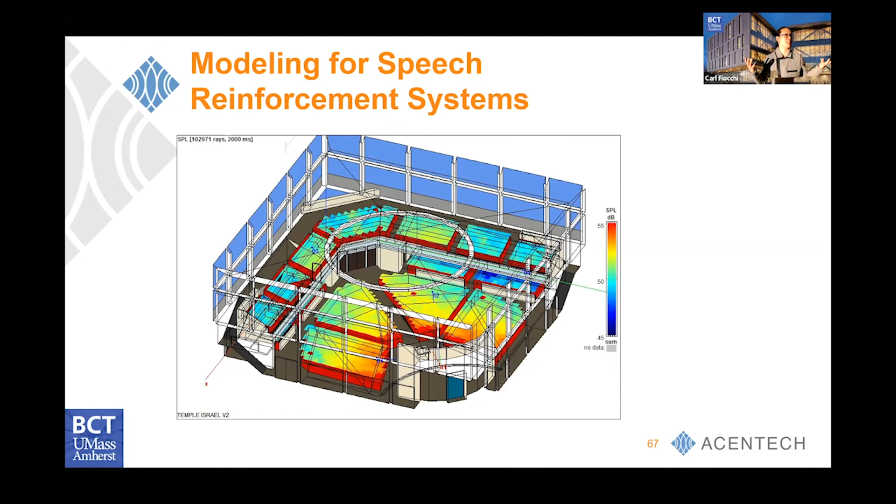Revit is probably the most commonly used, however they often are not enclosed. So in sound and lighting modeling, we have to recreate the model from scratch with SketchUp and make sure all the planes snap and that no sound or light is leaking out of the space. These are another example of that.

For vibration, I think we don't use SketchUp. However, we do rely on PDFs and measuring those out, then use our MATLAB scripts to calculate how footfall behaves in the structure at different walking speeds and check for the resonances that are created. There are many tools I'm sure we can use to help predict sound and vibration that we're still exploring, but these are just a few examples.

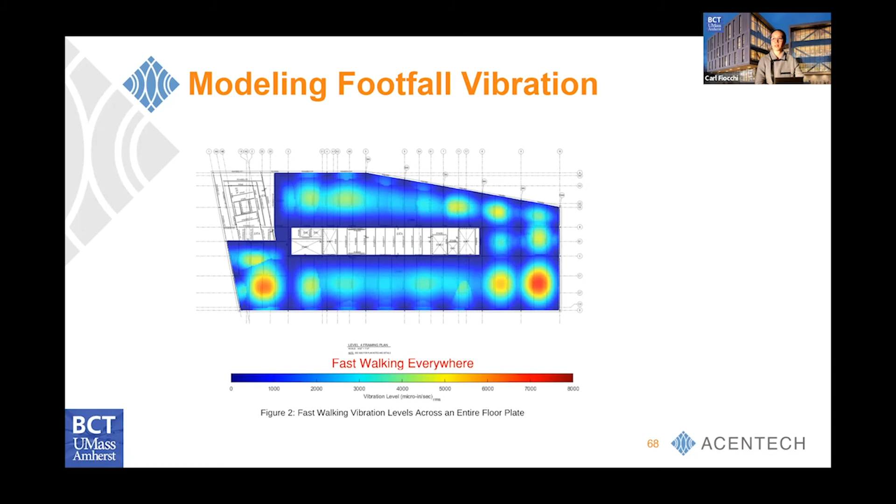That's all I have today. Thank you very much for listening. Hopefully you found this informational, and if you have any questions, please email me or ask me right now.

You mentioned the mills earlier. What's your go-to solution for upgrading acoustics in mills?

Mill buildings usually have the problem that structurally they can't handle more mass, so a lot of times we ask for something lighter, such as gypsum concrete instead. We often decouple the gypcrete from the base wood structure, and also try to suspend the ceiling if they allow us to. Of course, with mill buildings, just like mass timber, everyone's trying to showcase the beautiful mill underside, so there's only so much we can do, at least for the residential side, to meet the code.

But for commercial use, like offices, there are plenty of offices that don't need to be as quiet, because if you hear a little bit of sound from upstairs, it's not as intrusive as in housing. So depending on the use, we've definitely done that.

And there's also, in the past, the architect did faux wood on the underside, but that kind of defeats the point. If you do faux wood underneath the real thing, then it's not as sustainable.